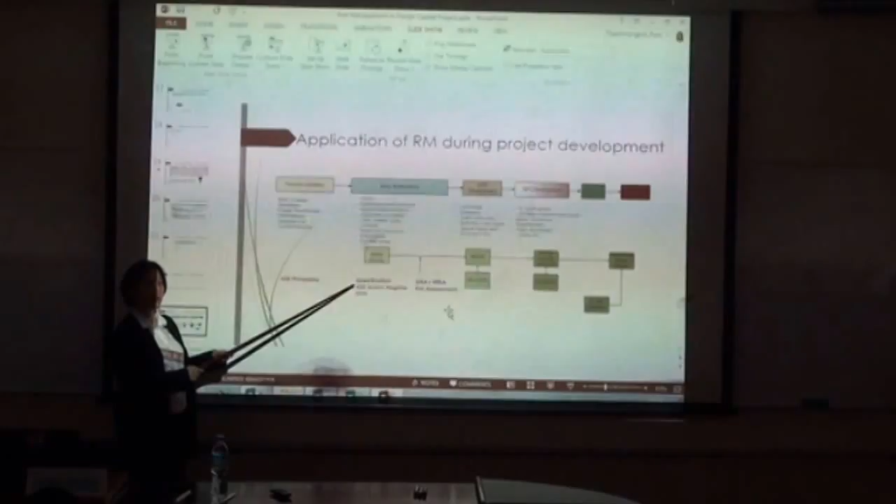In the next phase, when they do basic engineering, we define a second tier document which is a specification. In this case it will be quite a detailed design requirements document, and we conduct most of the screening through step 2.

So we conduct HAZID and HAZOP during this phase, because those workshops have to be done as early as possible so that when we know there are some design issues, we can incorporate our requirements into other disciplines so that the design will take this into account.

Then, once the design is mature enough, we take the design information from other disciplines and send it to the consultant to do all the fire and risk exposure studies.

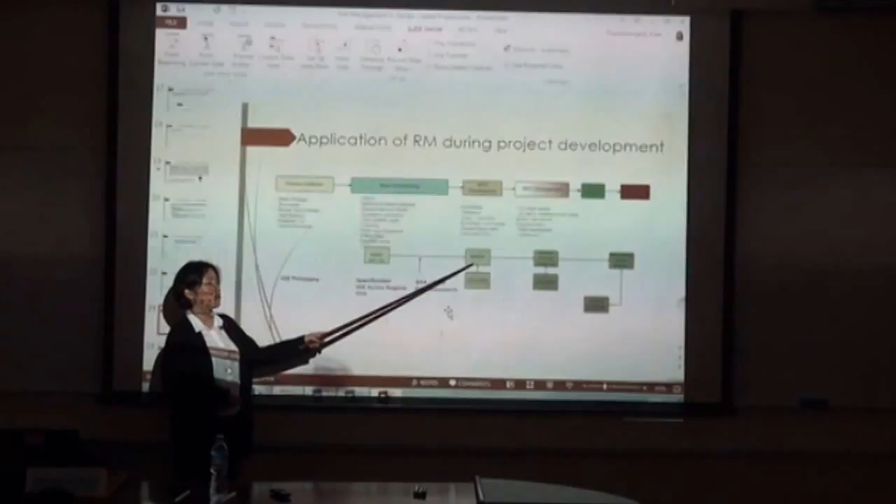And then when other disciplines finish with the process design, we do the detailed workshop on the hazard and operability studies, and the SIL and LOPA, to identify the safety integrity requirement.

And then as the project progresses along, there will be some design changes, so we have to re-HAZOP some of the scope changes and also re-do SIL and LOPA. So all of the study phases here will go into the recommendation and tracking system.

So when we finish designing, when it's manufacture and installation and before commissioning, there will be a pre-startup audit to check if all the safety elements are in place already and ready for commissioning and startup.

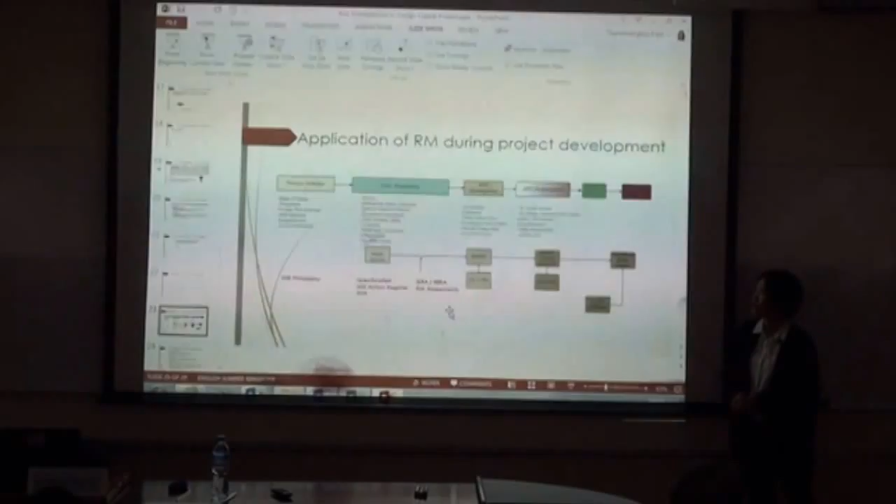And usually one of the inputs during the startup is the ALARP report or ALARP demonstration, but we have to take the ALARP decision since the time when we know the recommendation from this phase and this study.

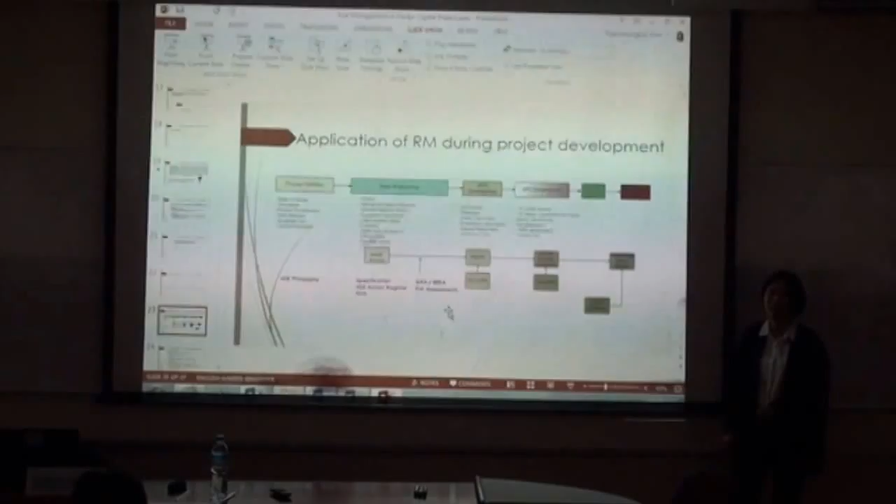We have to work with it along the way, because if you're going to write an ALARP report towards the end without it properly done since the beginning, you will find that you miss some design elements to bring the risk down. Then it will be very difficult to convince the client that this design is already at ALARP level. So actually the monitoring process of recommendations from different studies is very important in the project, and it can actually become a project risk.

Now I'm going to go into an example of how this framework has an impact on risk management. There was one project which was in the front-end design stage, and we brought the noise requirement to a noise specialist. The specialist looked at the numbers and said this requirement is very stringent. So I think we have to make sure the noise mapping studies take place quite early so we know what the impacts are.

At least you have one trigger, since you already know in context that this may be an issue. Indeed, after we finished the noise mapping studies, we saw that the noise contour for this project did not meet the legal requirements of the client, because the client has a very strict noise level allowable at different times. In this country, they define it during different 8-hour periods — morning to lunch has one allowed level, evening another, and night time another. Each level is stringent because they say residential areas need good health. So we could not meet the numbers for night time, because the level was lower, like 45 decibels, I think.

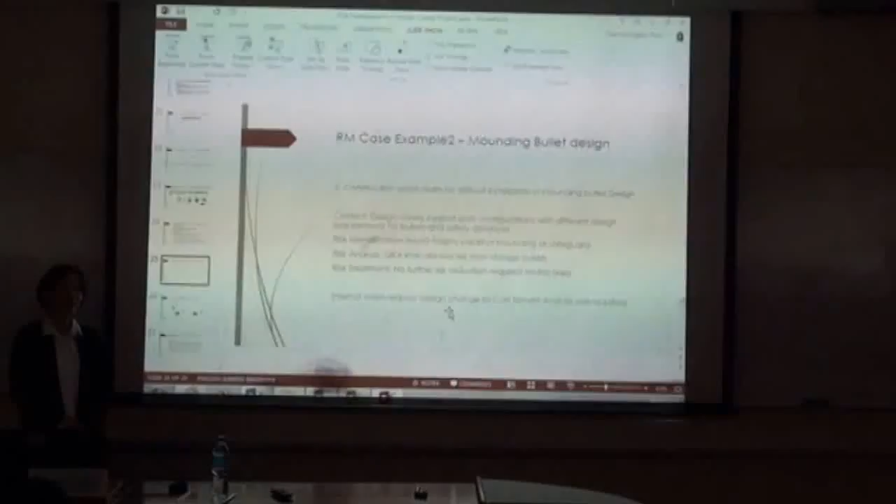The second case is we have a pressurized vessel, and we have to make a design decision whether this vessel will be a normal above ground installation, or are we gonna put it underground and bury it, which is called mounding.

In industry, if you read the codes, you can do both. If you do above ground, you have to design like this. If you do mounding, you have to take this into account. So the code usually tells you two ways of doing things. It will not tell you to choose above ground or underground, but they say if you choose above ground it's like this, and underground is like this.

Normally it's either the client or engineering design contractor who justifies which system to choose. In this case, since the beginning, we chose underground mounding because of safety risk, since the inventory of this tank is very high and it is quite a dangerous tank because of its inventory, and it is LPG. If LPG leaks from that huge inventory, it will continue leaking until it's finished.

So we know the safety risk and consequence impact of the leak could be high, so we try to mitigate it as much as possible. When we performed the HAZOP at the beginning of the project, we already said this unit will be mounded as a safeguard, because it's our design intention to put it underground.

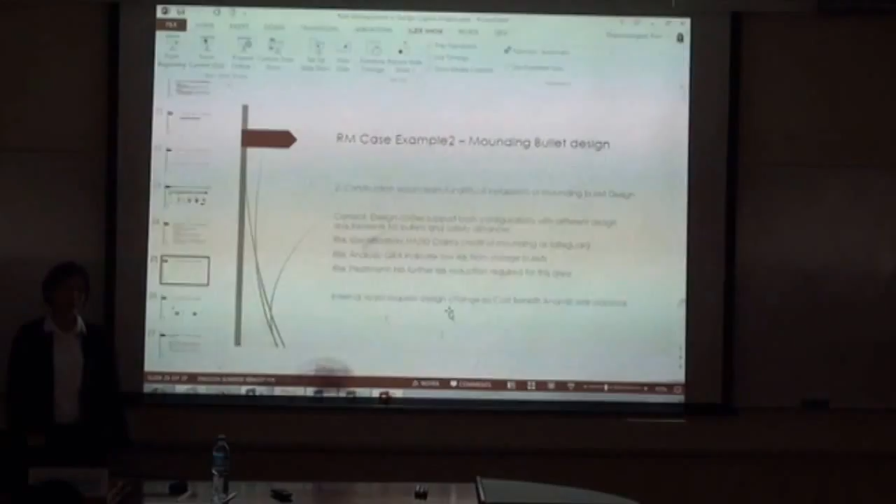But then later on, the construction team came to the project and said they had a lesson learned from a previous project: if we construct it as a mounded unit, it will have more construction cost and would delay the project, because from previous experience it's quite difficult to make sure the mounding process has all the soils even and compact, and all this requires very detailed actions.

This requires a skilled contractor, and at this phase, of course, we are in FEED and we don't know who our contractors will be, what their skills are, and it's a very long way ahead. So the construction team asks the project, and most people actually challenge this requirement: are we gonna put it above ground or underground? Why does it have to be underground?

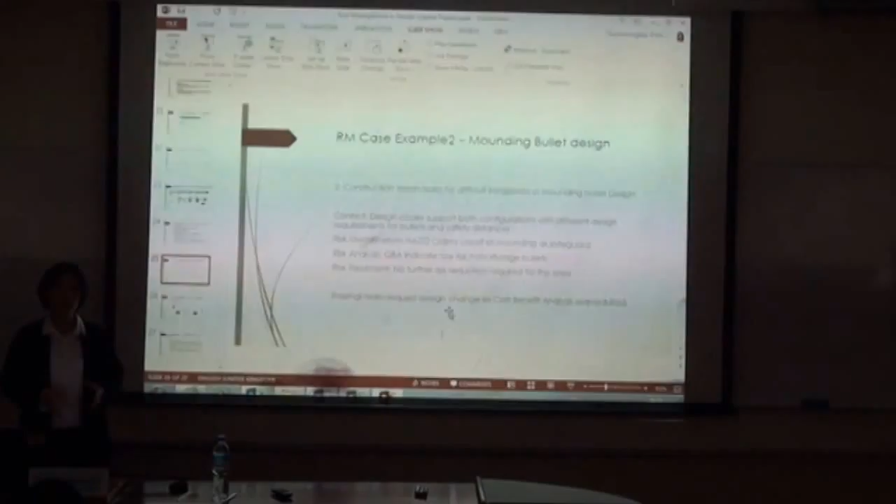Just for the basics before we go to the next phase: in the HAZOP, we say it's gonna be underground. From the QRA, it's already demonstrated that the risk from this unit is low because of the mounded configuration. So at that point, we say we don't need to treat the risk for this unit any further, because we did everything we could and we think it is a good design.

But there were internal requests like this, so what happens is we have to come back and re-evaluate the impact and then do the cost-benefit analysis to compare between the options of underground and above ground.

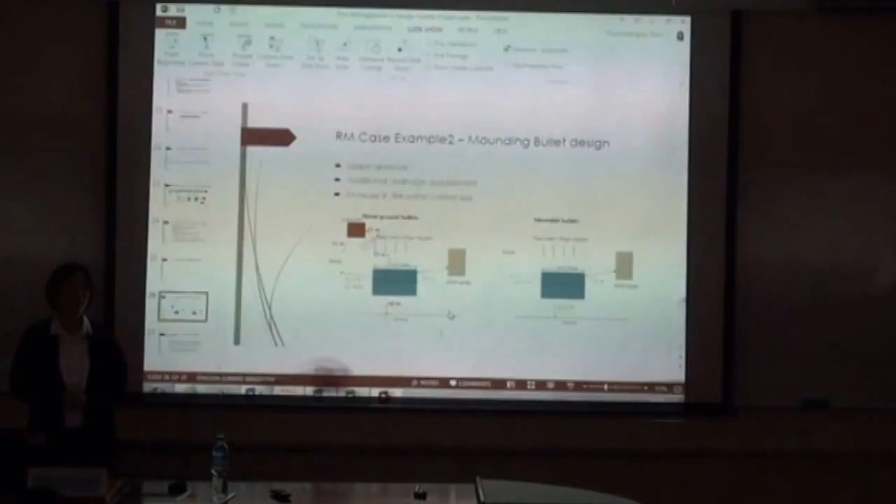One of the main concerns is that the client gives us quite a small plot area. By the code, if you put the tank above ground, the safety distance required is significant - it has to be at least 60 meters to the fence because of the inventory quantities. But if we mound it, general practice allows it to be 22 meters. So at least I'm saving 40 meters.

And in this case, it was significant because of the way we laid out the overall plot - every meter counts. So yeah, it was quite a difficult plot arrangement. So one of the explanations is the safety distance.

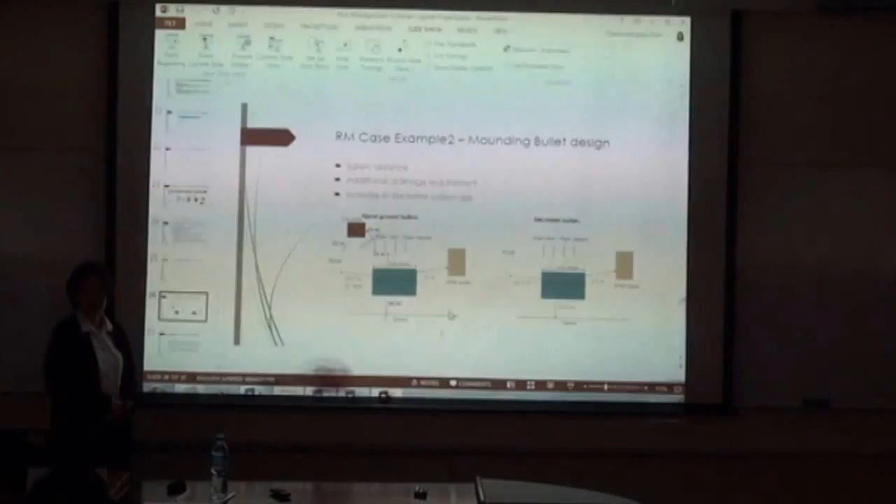The second part is that if we put the bullet above ground, when it is leaking you need to drain it somewhere, and how big is the drainage? Because the capacity is very huge - if you have an LPG vessel leak, you will see it form liquid LPG on the ground.

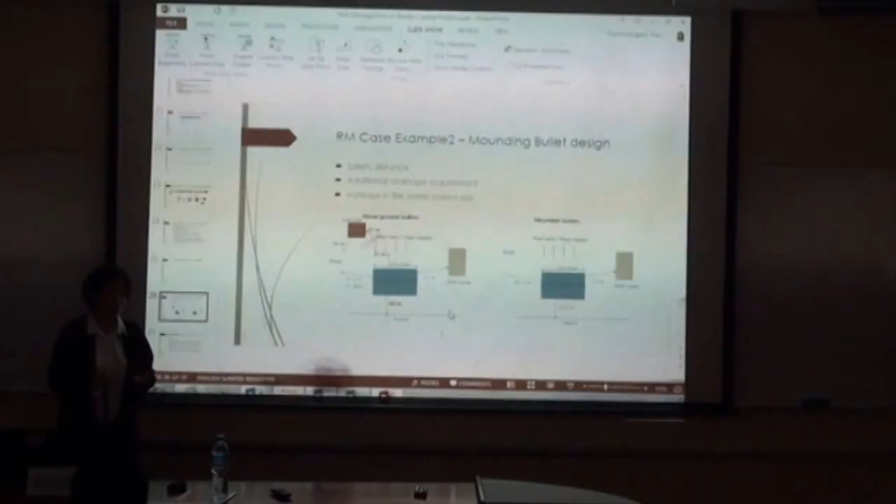If you do not move it away, then when it ignites, you will have a fire underneath the tank, and that is the most dangerous situation we try to avoid. Because if you have a fire right at the bottom of the tank, the tank will absorb the heat, and because LPG is volatile, it will evaporate inside and cause an internal pressure increase and explosion. This situation is called Boiling Liquid Expanding Vapor Explosion - this is the situation we try to avoid.

If we have it above ground, we have to make sure that when it's ignited, it flows away quickly to different points. Then if there is an ignition at that point, at least it remains there and doesn't directly impinge or impact the fire, or impact the vessel directly.

So I told them, yes, we can put it above ground, but you need to give me this space for a small impounding area to collect liquid spill, and that has to be away from the pipe rack because we don't want fire to damage the pipe rack. So this is my requirement.

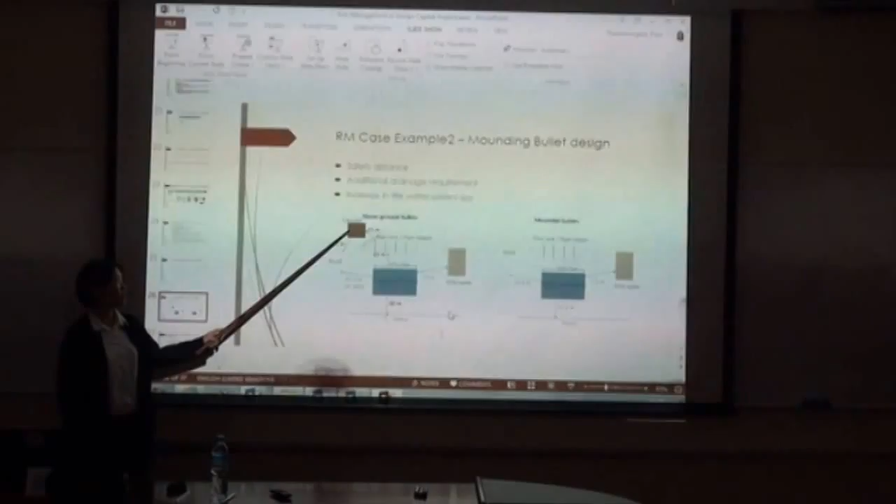When we put it above ground, we have more surface that will require fire water spray when there's a fire, to cool the surface down. So the fire water demand is bigger. If you put it underground, you only need to spray the front part that is exposed to the air. So this is the difference.

So we did this costing of the change in design, and at the end the project agreed that the cost of changing the design and increasing the risk does not make sense to execute, and hence they kept it underground. But that means they have to pay more attention to construction and site preparation, and have other mitigation means.

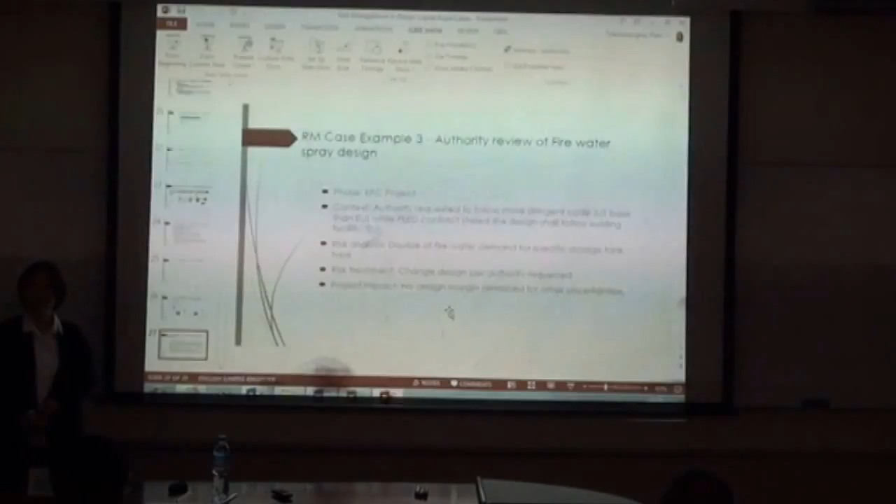Last example is fire water requirement. This actually happened in one real life project. We needed to do FEED, and then moved into detail design.

So when we were in the FEED stage, we said that for a certain tank configuration, we use a spray density of 2 liters per minute per meter square of surface. Then we did all the calculations, sized the fire water tank and the total fire water demand and everything, already entering that sizing basis with some margin.

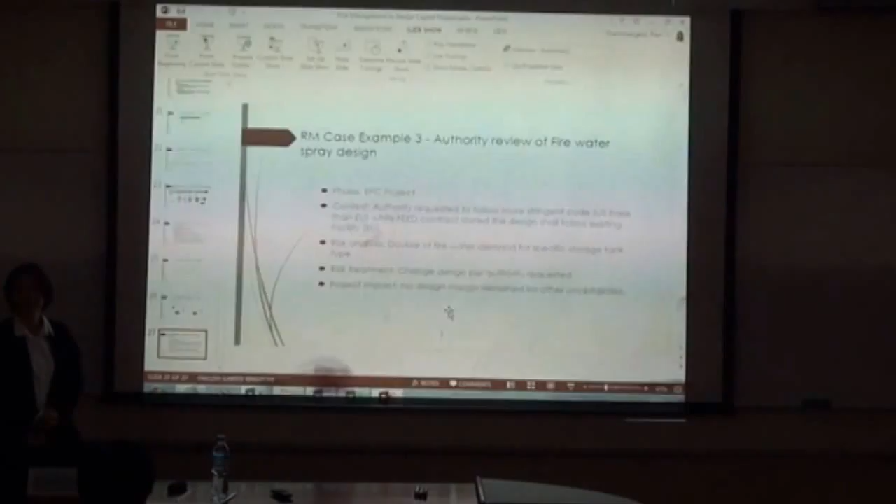Then at the end, the client brought our design package to the authority for fire protection review. The authority said that for this particular tank or system, the density has to be 4 liters per minute, not 2. So obviously we underestimated the design by half of the requirement.

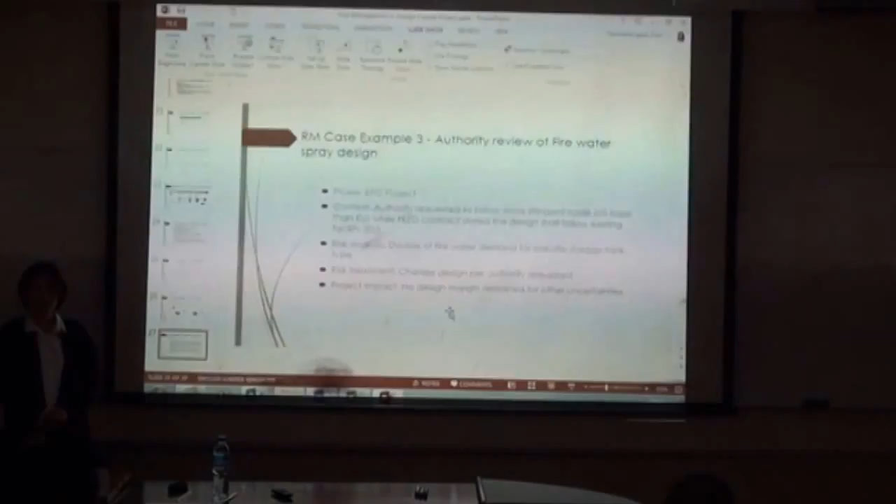We tried to understand if it was possible to use our original number or not, but the authority said we have to follow the 4 liters per minute requirement.

This was one of our big lessons learned, because when we were in FEED, the client informed us that we have to follow the adjacent plant design since this facility is being built next to their old facilities. They said to use the basis of the previous project, so we followed that and used the same numbers.

But that previous project did not have to go through this authority gate review because the legal requirement was not in place at that time. Our project, however, did have to go through it. So we faced this problem.

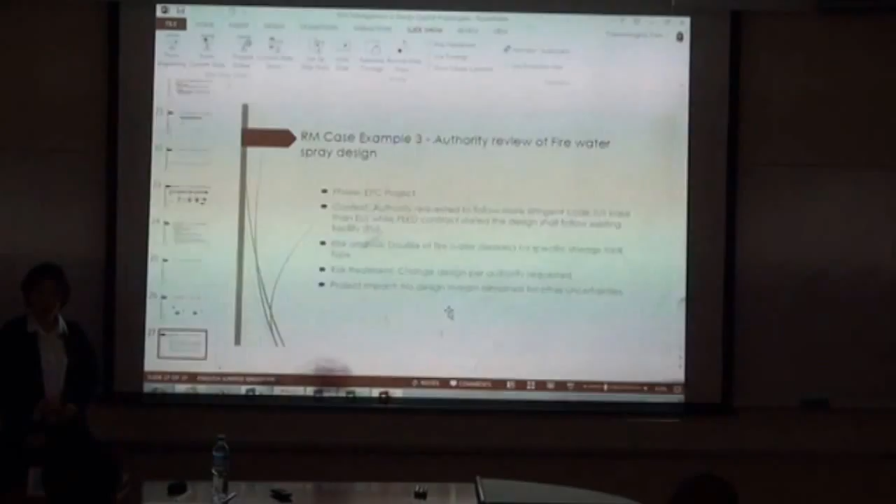And at the end, we had to change the design, which means a cost impact on our system, like piping and sizing of our water system, that we had to follow.

But previously, the number we used, 2 liters per minute, was also not wrong, because it complied with the EU code, which is European-based. But the authority preferred us to follow the American-based code.

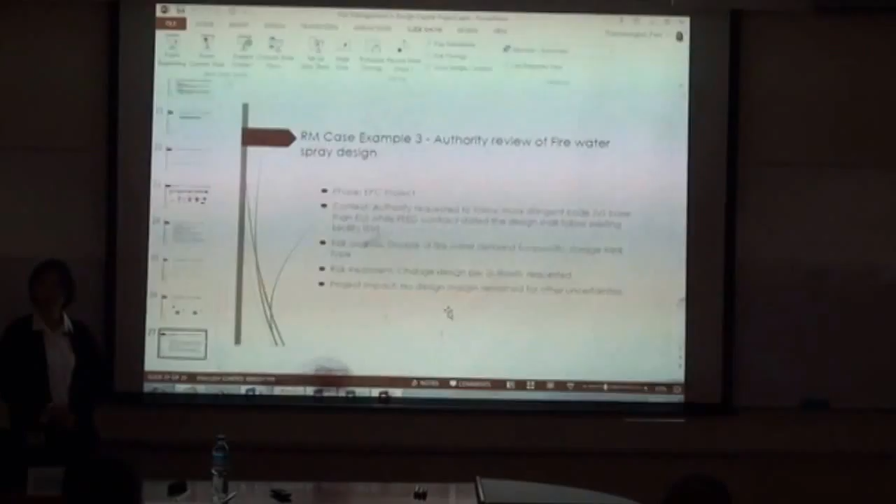With this kind of situation, if we had known upfront that the authority preferred the American-based code, we would have sized and priced everything accordingly from the start, instead of keeping our own budget in the detail engineering design phase and having to retrofit it according to the authority requirements.

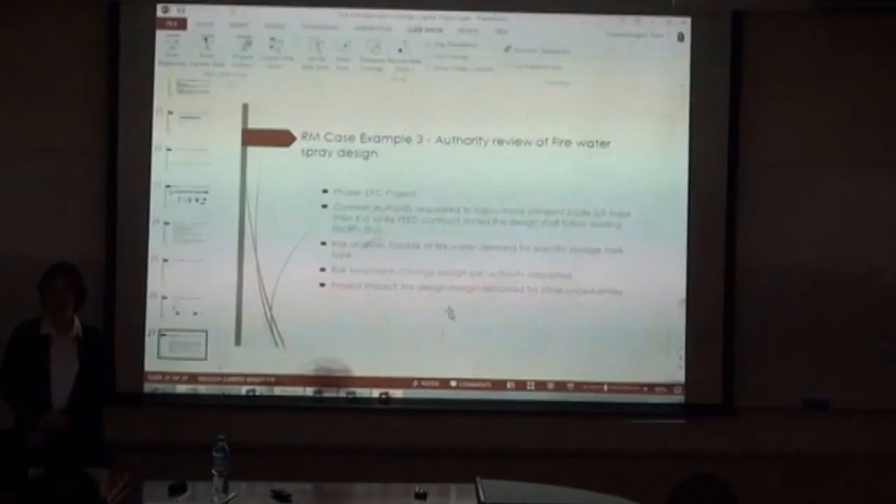So this is one of the big lessons learned: when you establish the context, you need to know all the requirements. At that time we did not know about this authority review process and its requirements at all. So that's the learning.

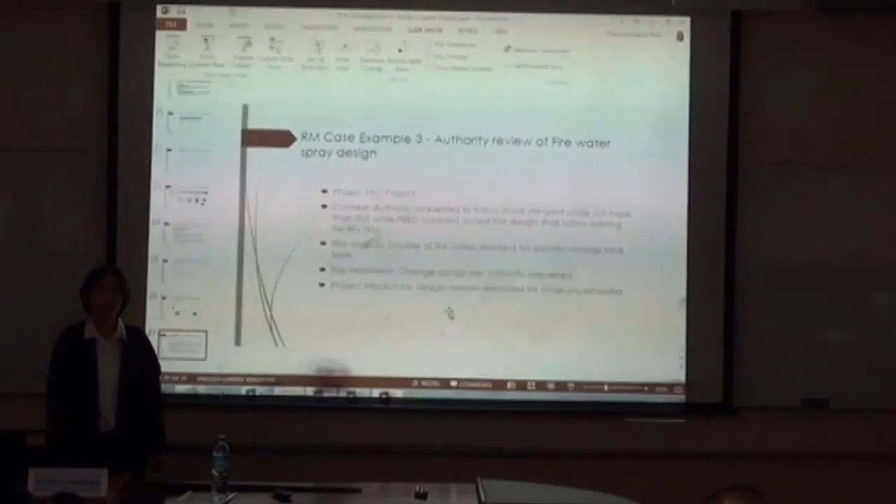Or any different experience that anyone wants to share with the class, because I think we all come from slightly different backgrounds and the way we manage or see things will be different in different industries.

Thank you for making it simpler, because in our course we don't have two courses, but that course is related to occupational health and safety. This presentation was more related to process safety, since your background is chemical engineering. We also have another applied course, applied project management in petrochemical, so this presentation seems to be the integration of both courses. Well, thank you, that's really nice.

I have one question. During the FEED design, you discussed everything about process safety, the plant and equipment. Do you consider human to machine integration or human ergonomics while designing?

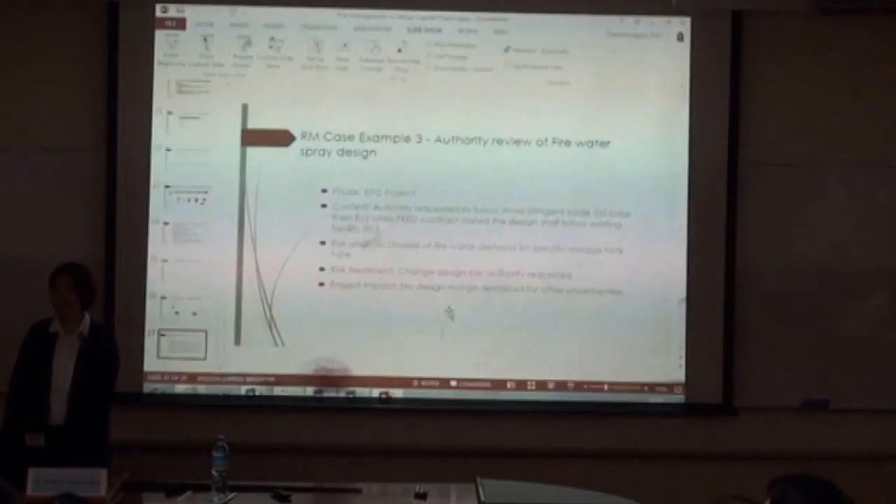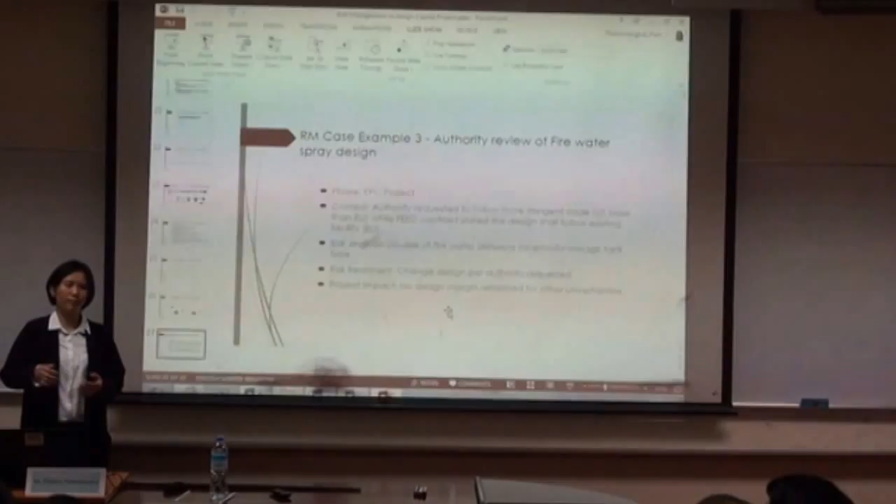This is one of the issues I have seen, that in many projects, especially in FEED phase, most of the time people ignore human factor or ergonomics design in FEED, and then when you come to EPC, usually the client will require that. So if you have not done human factor screening in FEED phase or identified some potential big issues, for example one of the big tasks related to control is the sizing, and how you design the screen and the integration between person and screen. If these requirements are not properly done in FEED, or there's at least some reserve budget for potential issues, it could become a problem.

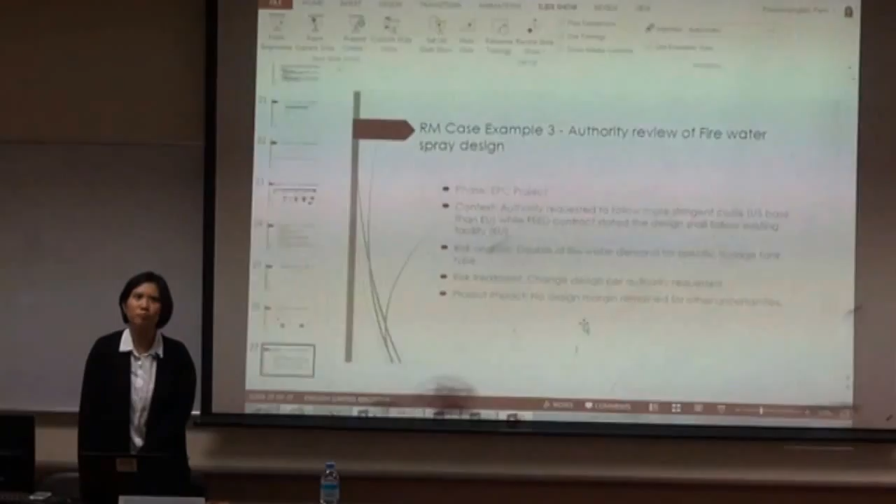But it depends, from my experience, because I have only worked 2 years in engineering design companies, and previously only in operation. So in my 2 years I have been on 2 FEED projects and 1 EPC currently ongoing. What I've seen is 1 FEED is not good and 1 FEED has done this well. So whether we do it or not is not our call, it's the client's call.

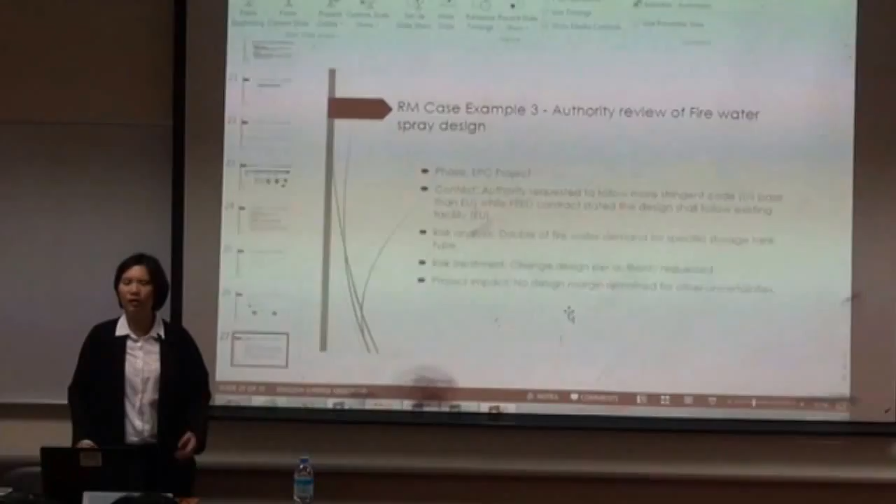Because clients, in FEED projects, come with a list of studies and deliverables that they require. Usually if it's not in that list of deliverables, you go to project management and say I need to spend 100 man hours, which costs this much, to perform this task and identify something. It is possible, but you need a good justification for that, and it depends on the understanding of the project as well, whether they would allow you to spend the money, and the impact if you do or don't do it.

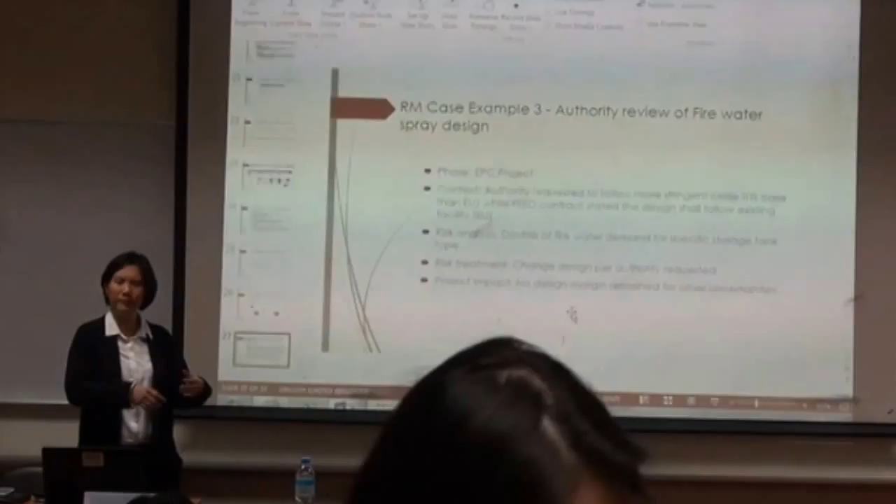But usually in FEED phase, at least in some projects that have been done, it's not detailed, it's only a screening to understand, for example in a refinery, what are the health issues, what kind of measures are needed. Like if you have truck loading operation, this has high human involvement and high risk as well because you are loading flammable liquid or LPG.

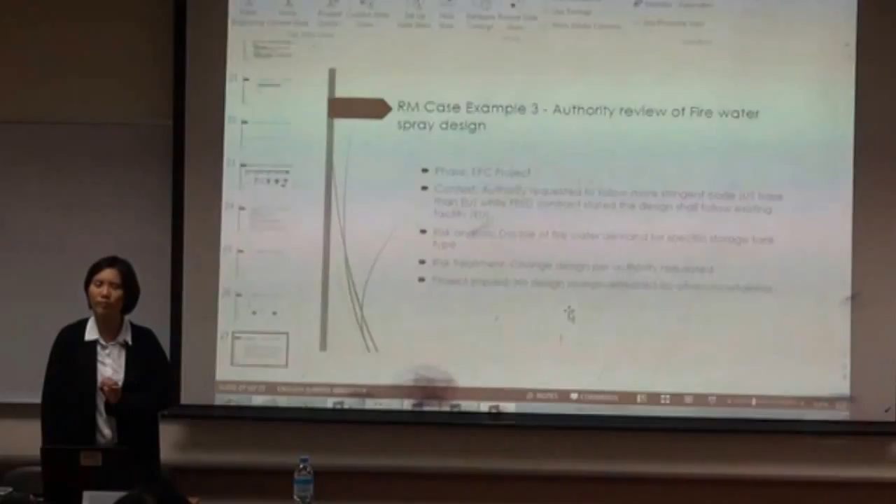So for those things, we at least identify the critical areas that will require further detailed development studies, so we know if unloading has an issue, how we bring in the truck and so on. We can talk to the plot plan team to make sure they give us enough turning circles for truck traffic. So it's a high level screening, but still enough to pick up big issues, at least to allocate the space, because once plot plan is frozen, it's very difficult to ask them to change or allocate things in different locations. So in FEED phase, sometimes we do this, sometimes we don't.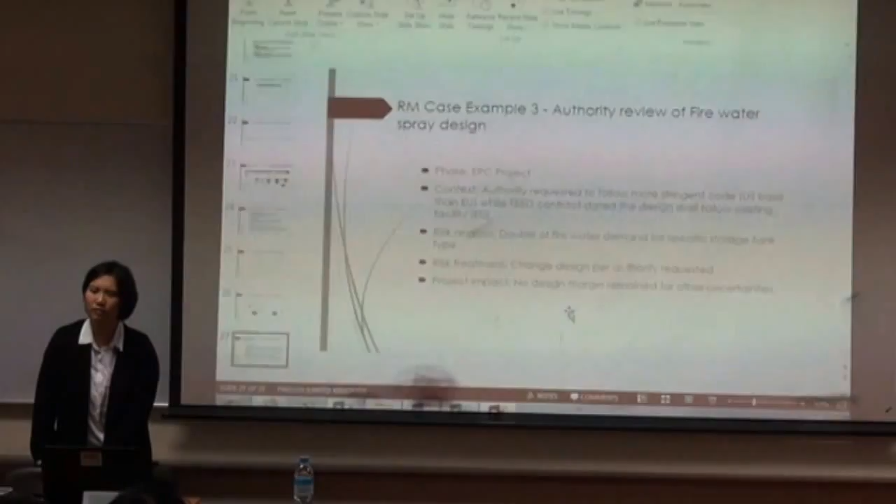It's really important because machines we can control, we have automation, control rooms and everything. Human behavior we cannot control, so it's quite unpredictable. We have to work on that because most incidents arise from human error, and the machine is not integrated with the workforce.

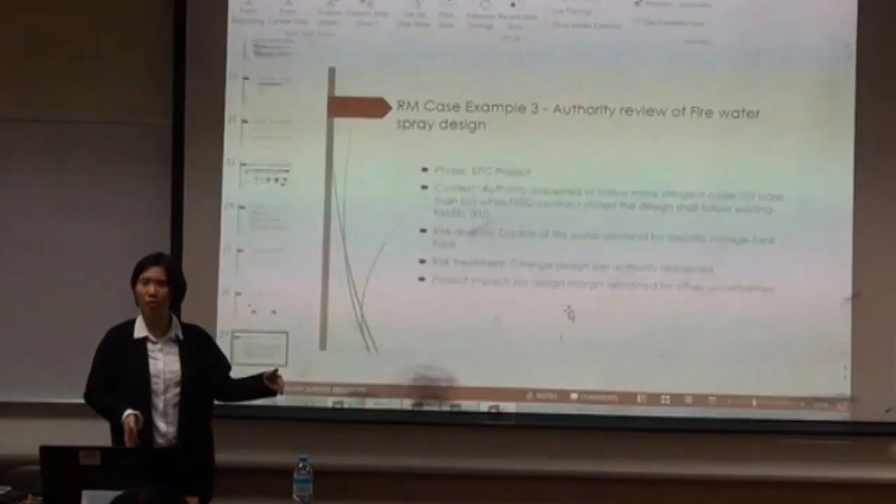They are not compatible. Part of the ergonomics design usually comes from safety specifications, like the height of a valve, if it's manual, if it's vertical, there are different requirements, what is the allowable space for personnel to walk around equipment. All these requirements are usually stated, but at the same time, even with these requirements, we also have to talk to other disciplines, because our requirements feed into piping design and into structure, since they have to do the platforms, the ladders, and so on. If we miss this, it could become a potential issue.

Any other questions?

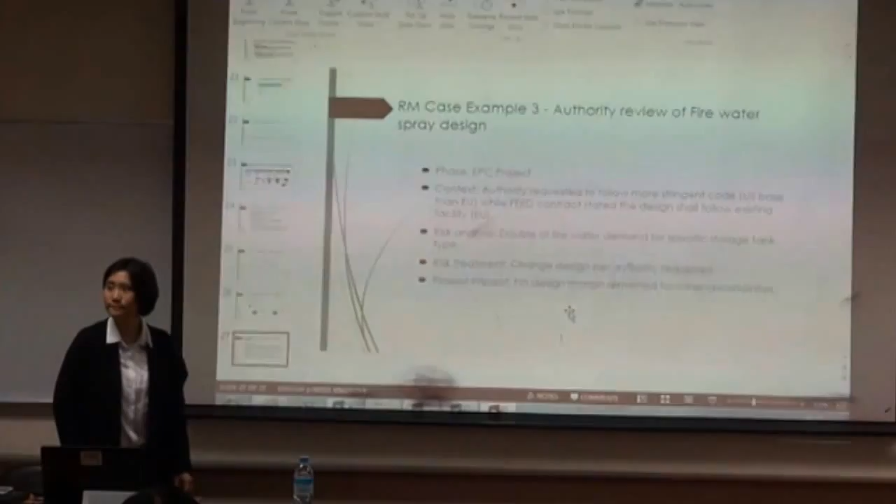During your work, you also have integration and you need communication with other disciplines. What are the difficulties or maybe the risks in communication?

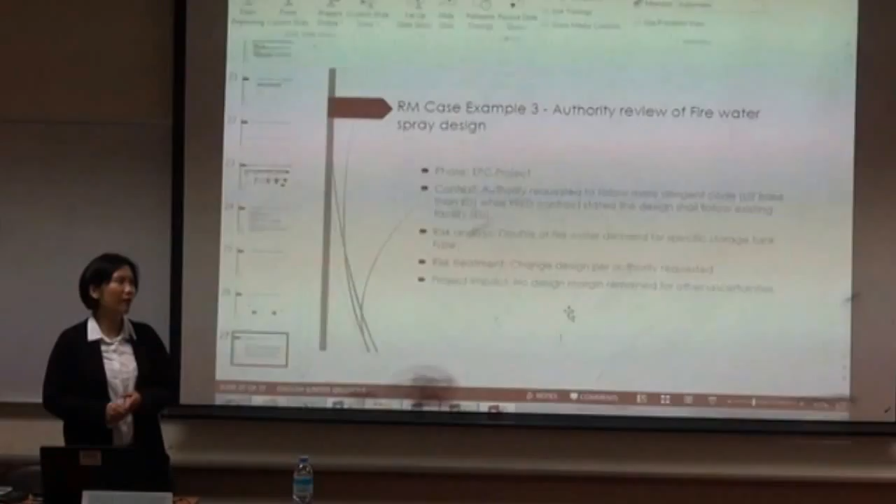Usually at the beginning of the process, each discipline has their own specification, and normally the design requirements are stated in those specifications. Before going to the client for review, we have an internal multidiscipline review process. So when it's sent to you, you have to read and comment on them, checking whether your requirements in that spec are missing something, for example a question on ergonomics.

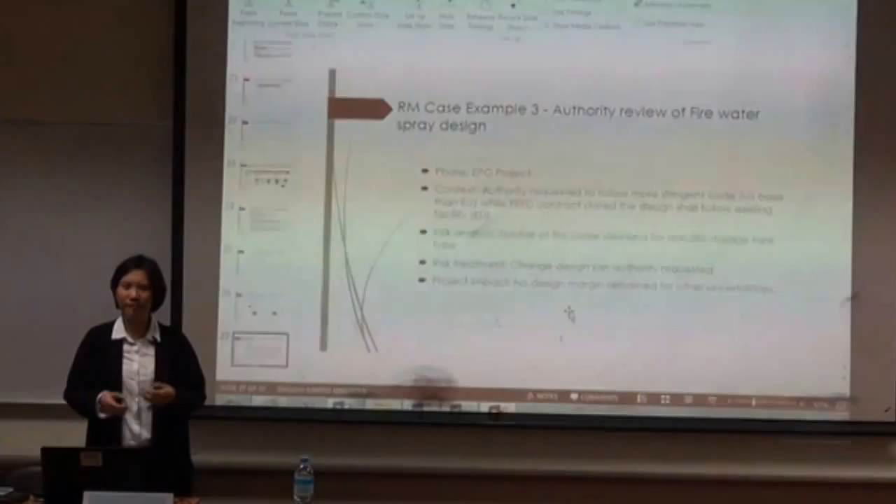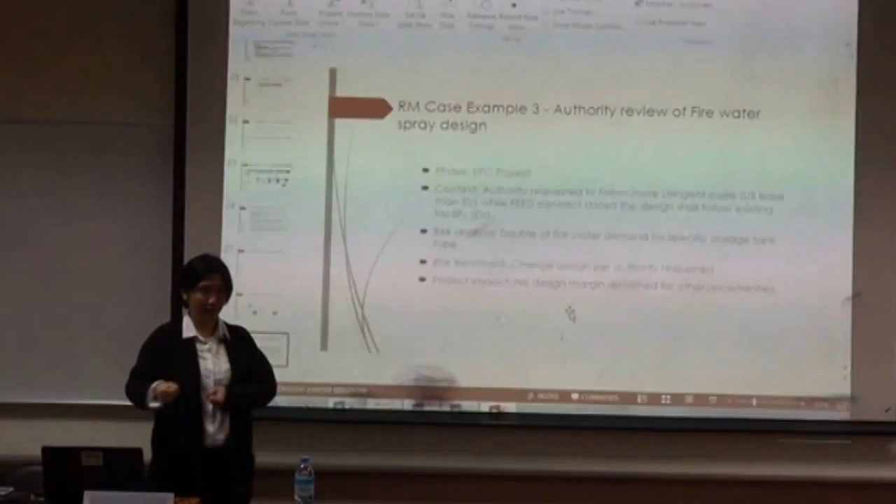But our human factors also have different requirements. For example, if the client requires it, normally we have to consider the platform width to allow people to carry a stretcher if there is an incident and need to transport the person. Then we find out there's a clash in specification - civil brings them down to the stair and makes a U-turn, but this landing platform is not enough, it's too small. So there's some kind of slight conflict in requirements.

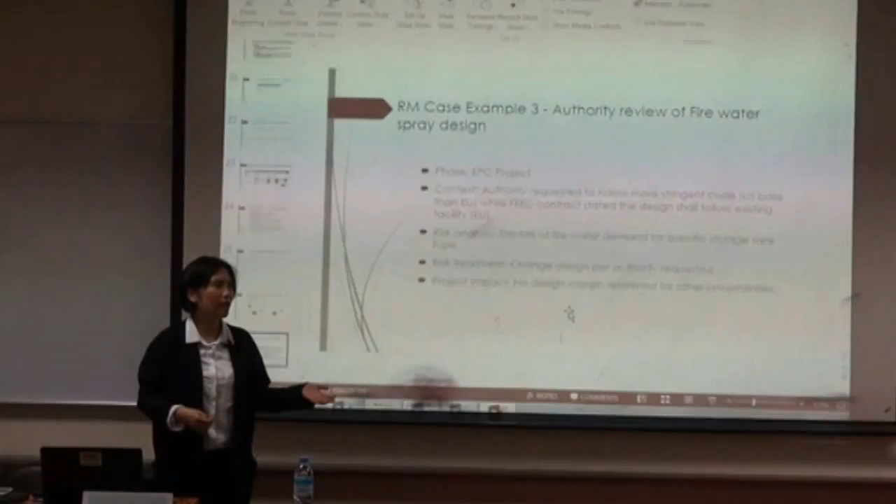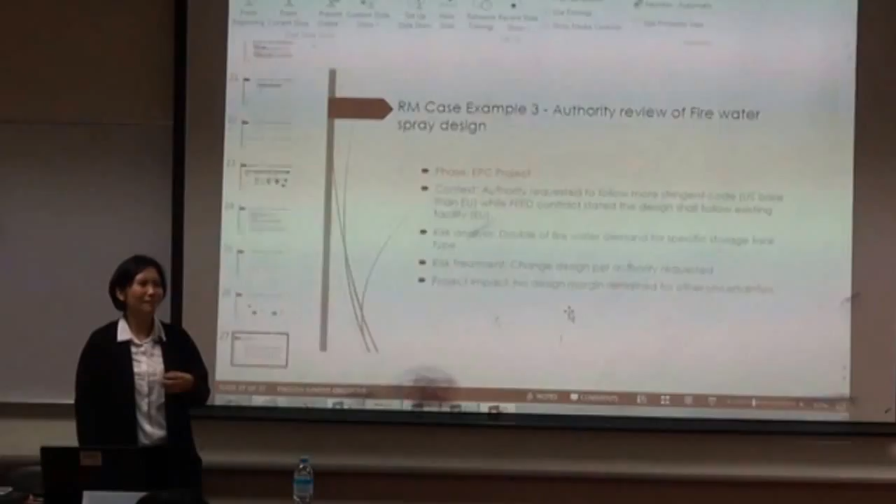If you know this upfront early in the project, by reading someone else's specification, we can have a discussion and early decision on how to treat them. Many times, working on the engineering side, safety cannot overrule everything unless it clearly does not meet the code and standard. But if something is just nice to have or general practice, finding this out in the middle phase of the project has more impact on the design and involves more people to make a decision.

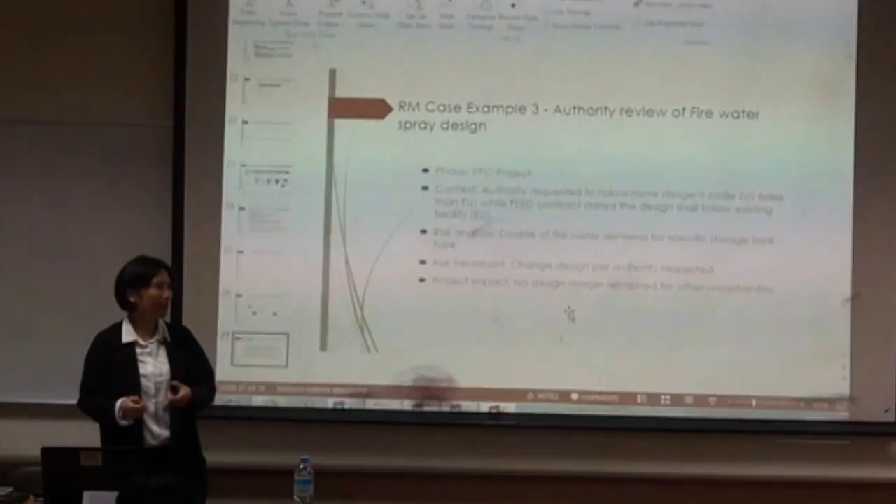Sometimes you can change it, and sometimes you may not be able to change it to the level you want - you may only change it slightly. So this is one way we do the discipline review of specifications. For your spec, you have to make sure everyone else, other teams, read it and comment. This is the part because I need to make sure they understand my requirements upfront, so they know if I ask for too much, it's already a conflict.

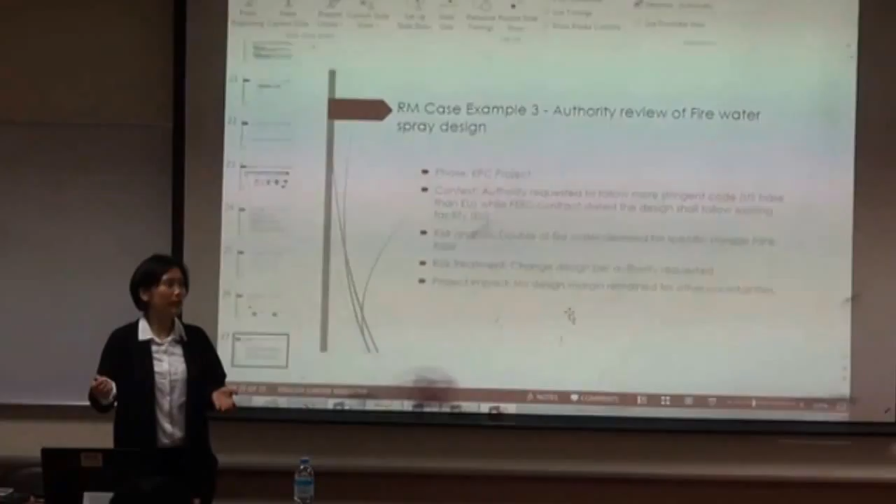For example, clients want us to use one type of cable with different test methods for resistance, and the instrument team is using different specs. They follow IEC, client asks for UL, the American one. In this case, if you ask safety, of course UL is better because the duration and integrity is safer, but IEC is already good enough as well. So there are some kinds of conflict like this all the time with every discipline, big and small.

So you have to spot that out quickly, and if it's a problem, it becomes a multidisciplinary decision to look at them together and then talk to clients. So managing other disciplines as well as managing the client is equally important.

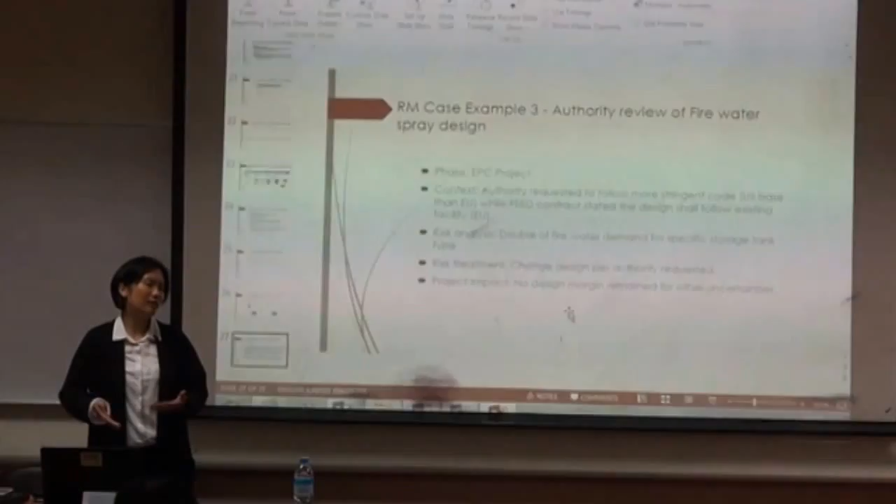Client management is a bit more difficult because as a client you're designing a facility that for them is like 30 years, a lifetime facility. So they want it to be the best, but sometimes due to project schedule, if they tell you what they want quite late in the project and you try to accommodate their requirement, it could jeopardize other disciplines.

From a safety point of view, it's quite a challenging position because most of the time when they want to save something, they will say this is not safe, and then everyone will come and ask what do you think, is this not safe? So it's sometimes quite difficult to manage.

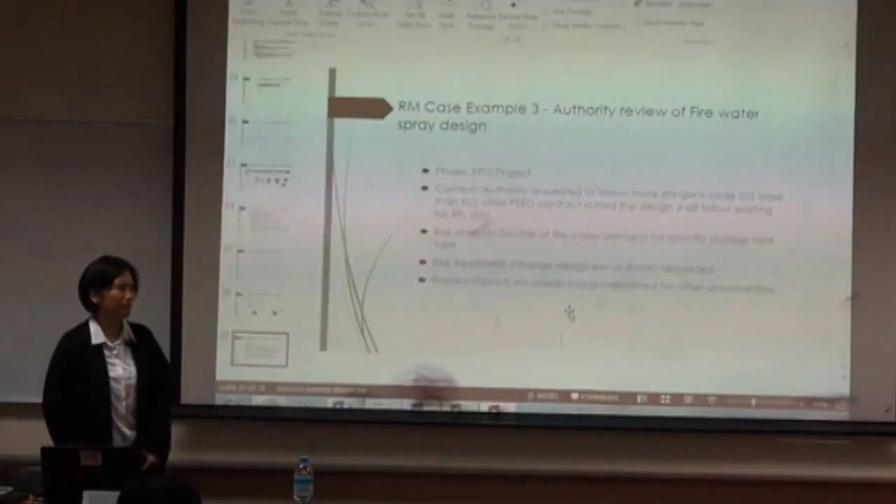But as a professional, because there is a lot of reference like industry experience, industry accidents, codes and standards, many things onshore and offshore, we have a lot of database to explain why we are doing this or why we don't think this is necessary for certain things that they request.

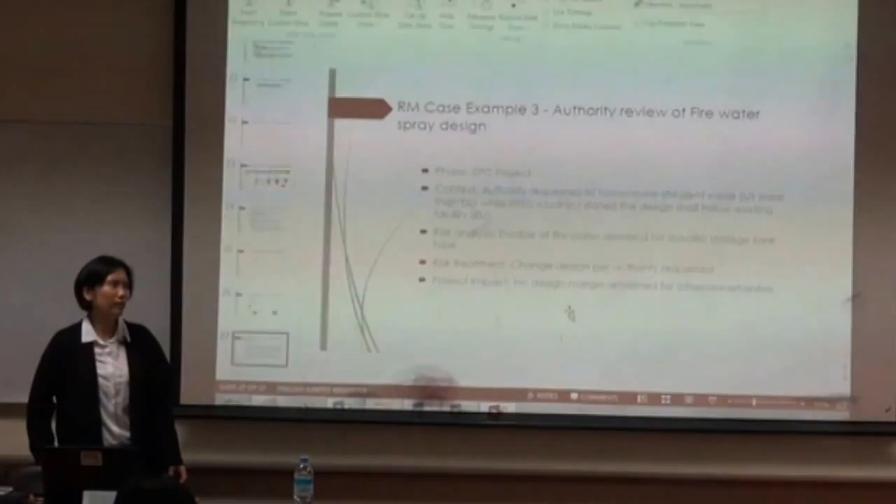Or at the same time, if we really insist that something needs to be changed, we also use that information to help internally. Because apart from convincing other disciplines, it's the project management's call whether they will allow such a change or not if it has a big impact.

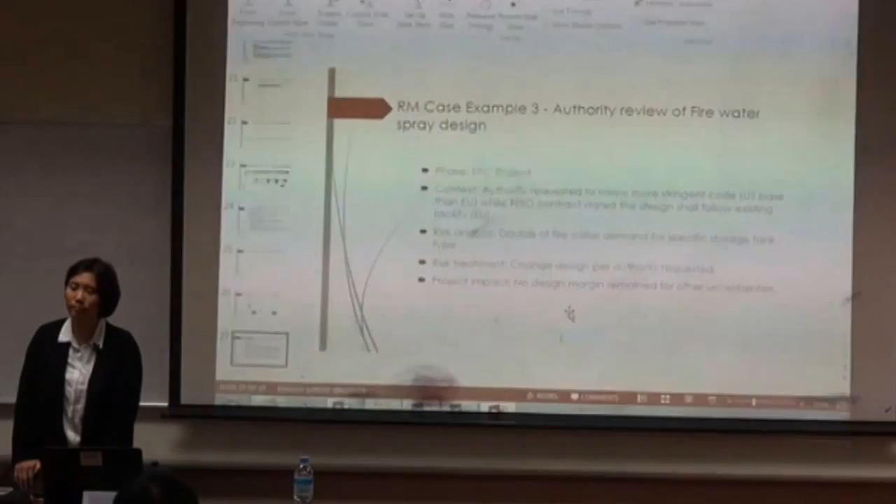Continuing this conversation, since you have worked with operations also, how was your experience? Because there's always a tussle between safety and production. Clients sometimes focus more on improving production, increasing production, so sometimes you have to compromise safety. So how was your experience?

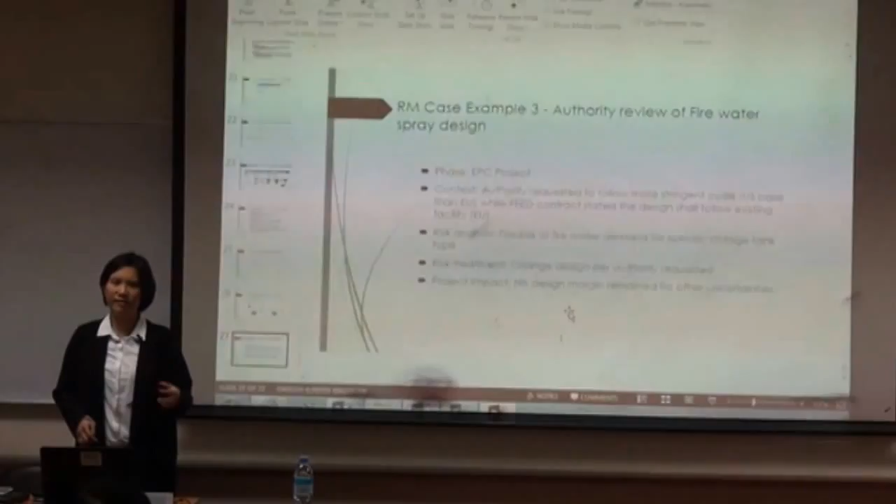Because of my background working for Chevron, they always taught me to put safety as a first priority. So when I work there and see something unsafe and make a recommendation, when I blow the whistle, everyone hears it. But when it comes to sitting at the engineering design office, most of the time, clients do not have a strong understanding of safety.

They are more focused on productivity, making sure it's reliable and continuously running, because each day that production stops means a loss in their money.

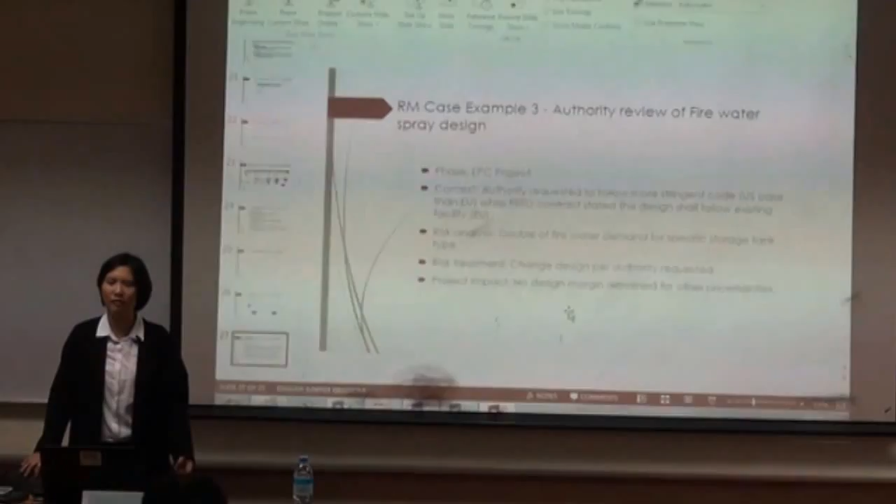So I experienced this once in my first FEED project, where they did not really focus on safety, and I had to step up and tell them, okay, this is what you want, but it's not safe. At the end it's your call, it's your people, but from our experience we think it should be like that. It's your decision - do you really want us to design like that?

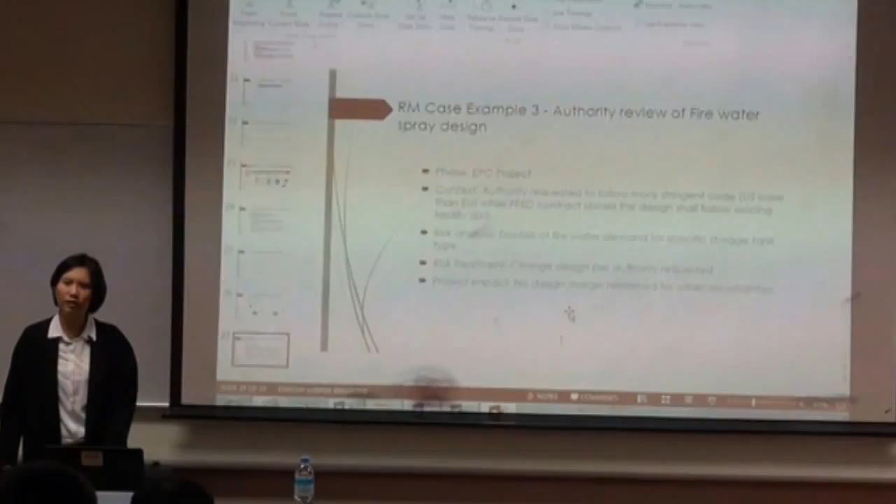Yeah, so we can have open communication to talk to them about such cases. Another thing I need to know is what kind of simulation software will you use during this CB&I?

If you are talking about safety, because we are responsible for firefighting design, like fire water design, so we use something like Pipenet to calculate the velocity, the flow of water inside the pipe and all this.

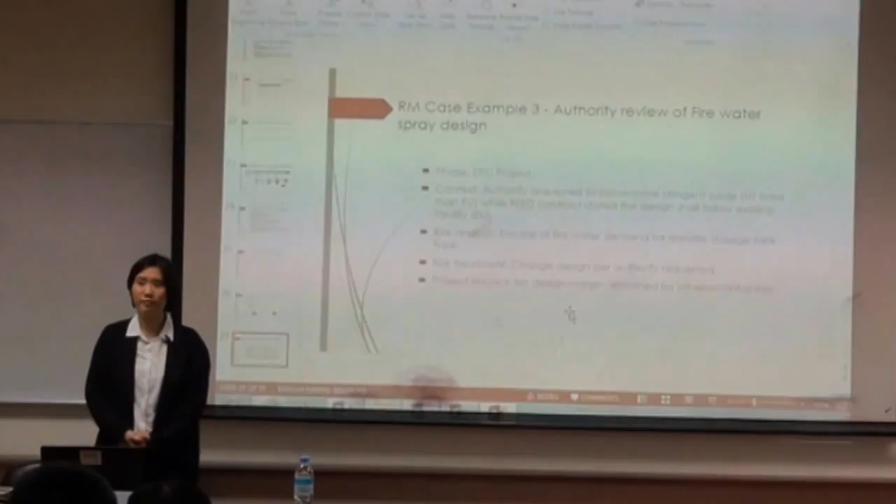When we do consequence modeling, we call it QRA. That depends on clients - sometimes they have a specific requirement, like you have to use PHAST software for consequence modeling. Sometimes they do not specify, so it depends on them.

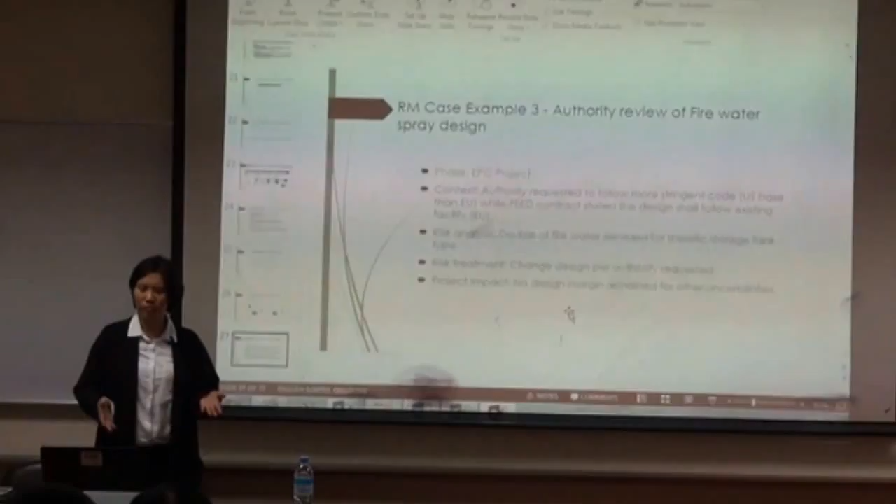In some projects we usually use PHAST for a quick QRA, but if you work for an offshore project, they will say we need a CFD simulation to simulate the risk. So it really depends on what they ask.

We also use a software like Blaze to simulate the failure time - if you have a fire imposing on equipment like vessels, how fast it will lose integrity and leak, burst, and so on. So we use these softwares, and also for noise.

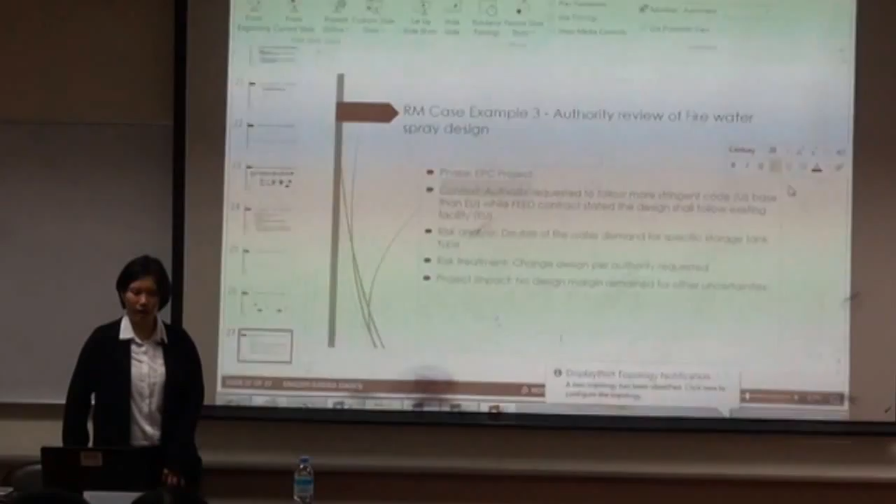There are a lot of noise mapping software, so that's one of the tools. And on the process safety side, we use things like PHA for HAZOP workshops and Excel sheets for SIL assessment.

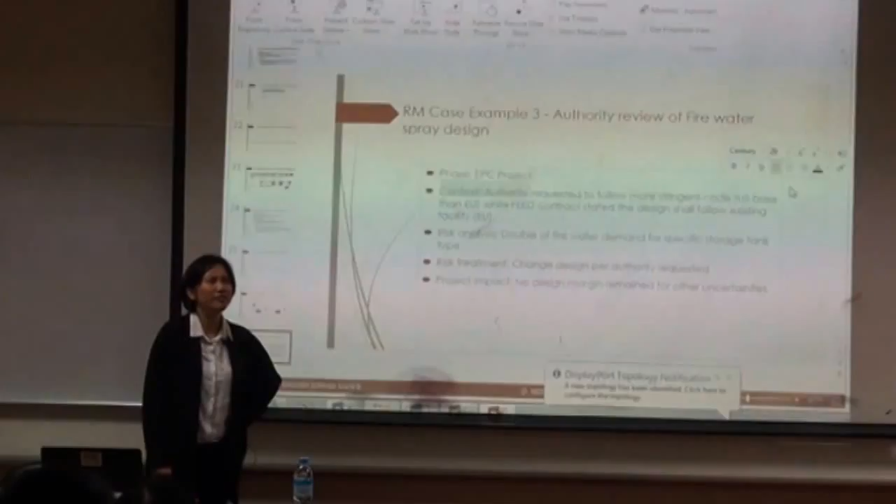Actually, I think whether it's developing or developed, it may not be as different in terms of requirements. With respect to requirements, it's more about the regulation of each local country. For example, in Thailand the requirement in fire safety is not as strict as in Oman. That's the legal part, but for the other part - the company itself - if you're working for Shell, whether it's Shell in Thailand or Shell elsewhere, it's the same product standard and level of expectation. So the company side really depends on each company.

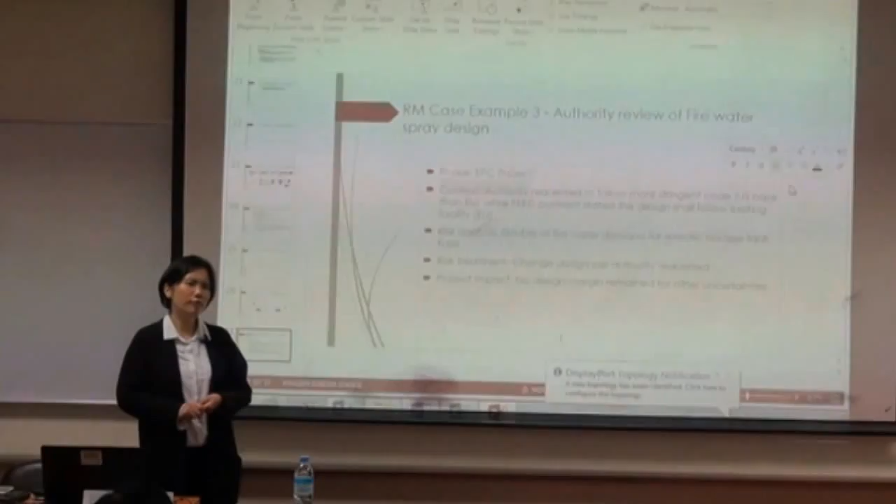But if you look at human behavior, this part actually has a slightly different role. For example, what I experienced is that in different plants, when I look at the firefighting design, sometimes they will say that if there is a fire, we will send people inside the fire. Whereas a different company will say that if there is a fire, we will shut down, put everything in automation, and run. So it's kind of a different strategy for firefighting.

But I think that is also due to the nature of the people and how well trained they are with respect to the facilities that are involved.

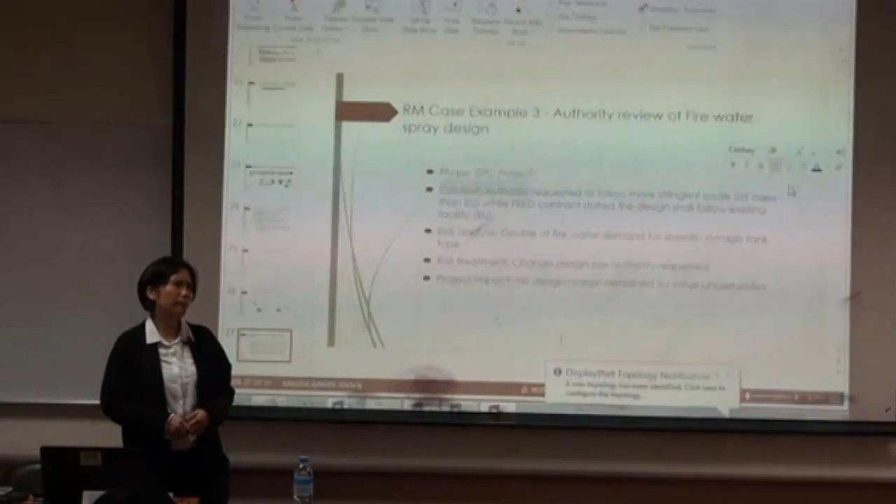And then the ergonomic side, this one is slightly different because of different posture and height. Sometimes it's a problem when you use big companies' codes and standards, usually based on European sizing, so the ladder cage and everything is quite big compared to Asia where we have slightly smaller bodies. It's difficult to ask the global authority for a smaller cage. This is known, but most companies insist on using a general number, standardized sizing, so if you're in one plant in Thailand and one in the US, it's the same. They usually say just follow it, but then the operator has to be more careful.

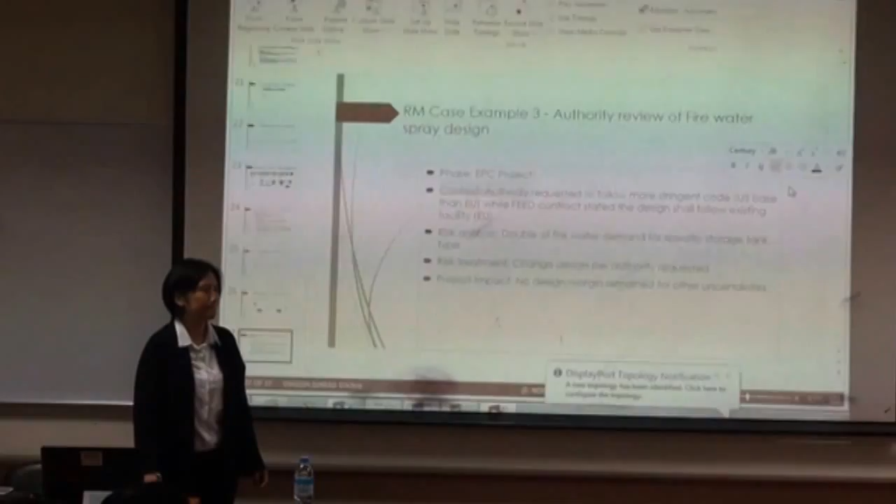So in oil and gas, usually the cost for safety, how many percent of production? It's a bit difficult to say, but I only know that usually the split between engineering and the rest is only like 10%. So cost-wise, 10%, and this 10% - all your choices in design - will impact the rest of the 90%, which is construction and actual processing.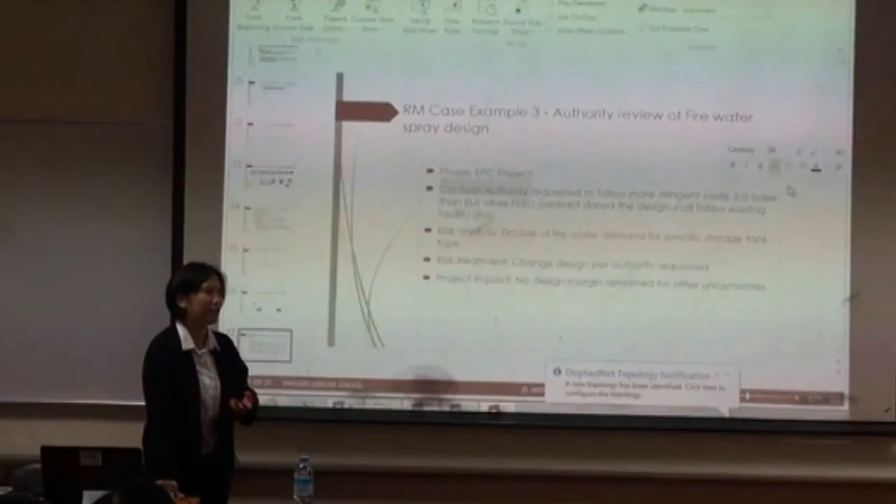So this puts us back to emphasizing that your design choice, not too much, not too little, is very important to balance the risk, but at the same time not over-design for something that will not be used. Because in safety, we face quite a challenge.

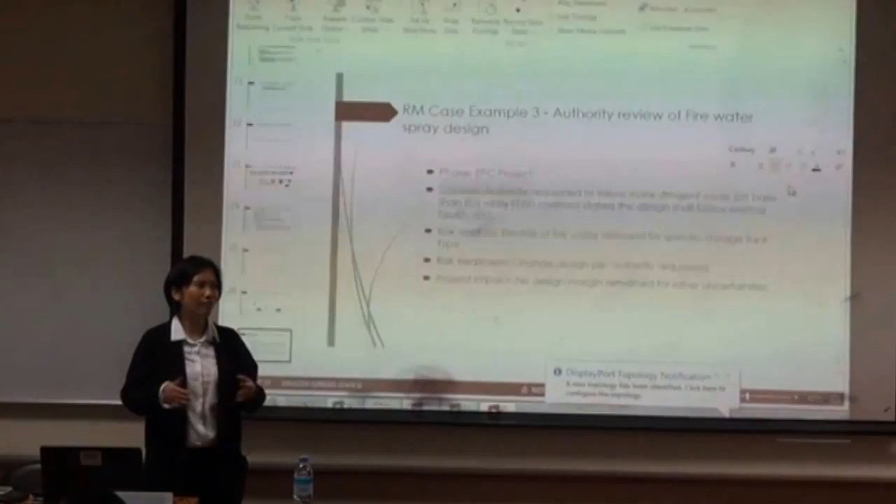Clients always ask a lot of things, and sometimes what they ask cannot be fully implemented because it's beyond normal industrial practice and will increase project costs a lot. So we have to negotiate and say that we understand your concern.

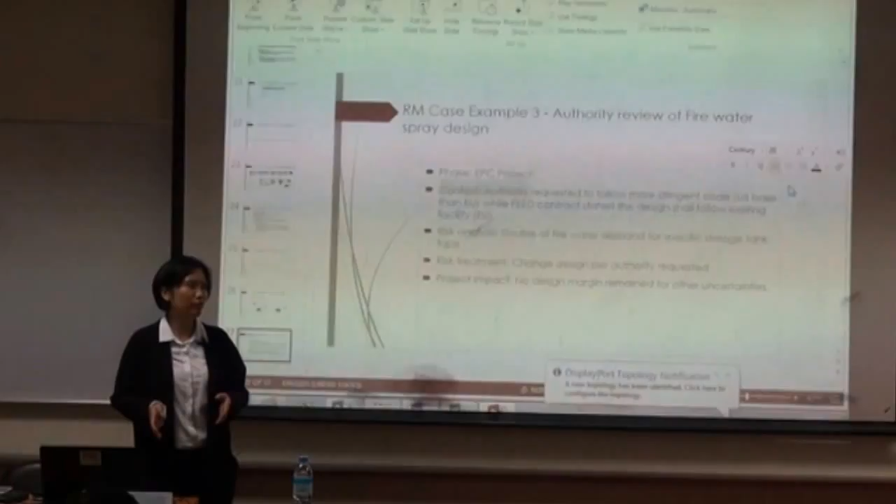Like if there is a fire, they ask us to fireproof everything, and we cannot fireproof everything. Fireproofing is not only costly, but when you put fireproofing on, you increase corrosion risk underneath it. So we try to only put fireproofing in the areas that are really important, to make sure the structure stands still under fire and doesn't collapse. We have to prioritize and only select the real elements that are really needed - it's kind of risk-based.

So it puts us back with clients, and we try to explain that we cannot give you fireproofing everywhere, but another system usually used for fighting fire is this, and we will ensure there is enough firefighting water reaching this area if you have a specific concern. So we have to negotiate.

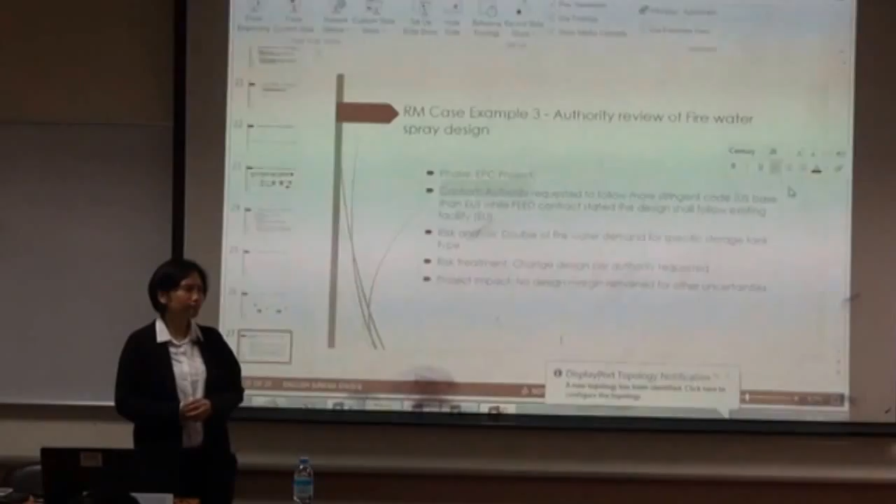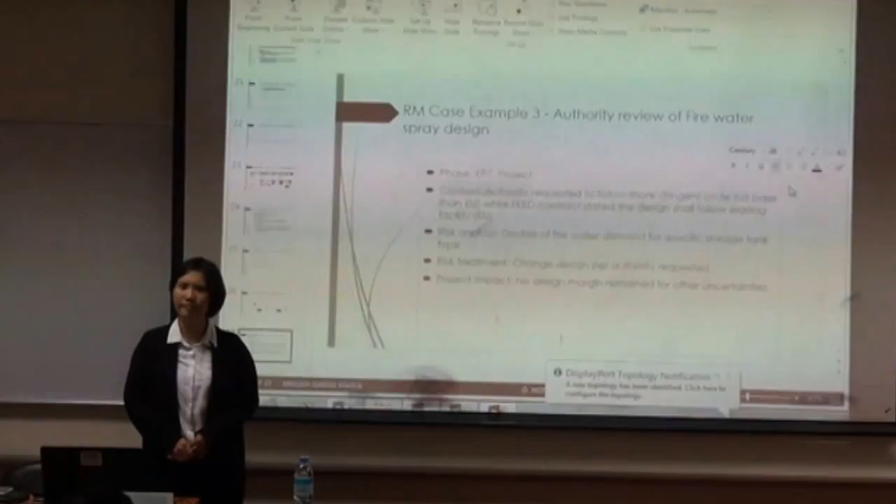Questions? I hope the talk at least gives you some basic understanding in case you have to go and work in the oil and gas industry, on the way they look at safety, because for oil and gas it's hydrocarbon, and obviously it's a risk to everyone. So this area of safety is quite specific, and still needs a lot of understanding and attention from other people, but we are getting there somehow.

Can we get your contact details because we need to ask something maybe later on? Oh, yeah.